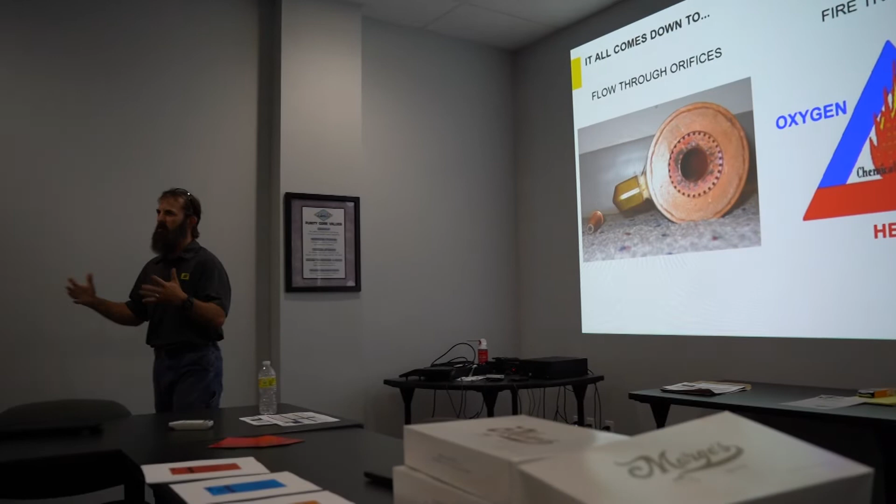What three things do we need to make a fire? If I remove any of those components, my fire goes out. Where this can get dangerous in the oxy-fuel world is our atmosphere is roughly 20% oxygen. I know it's not exact, but I like nice even round numbers, so I'll keep it simple. So things that will burn in our atmosphere, paper, cardboard, whatever it might be, in a pure oxygen environment are going to burn 5 times faster.

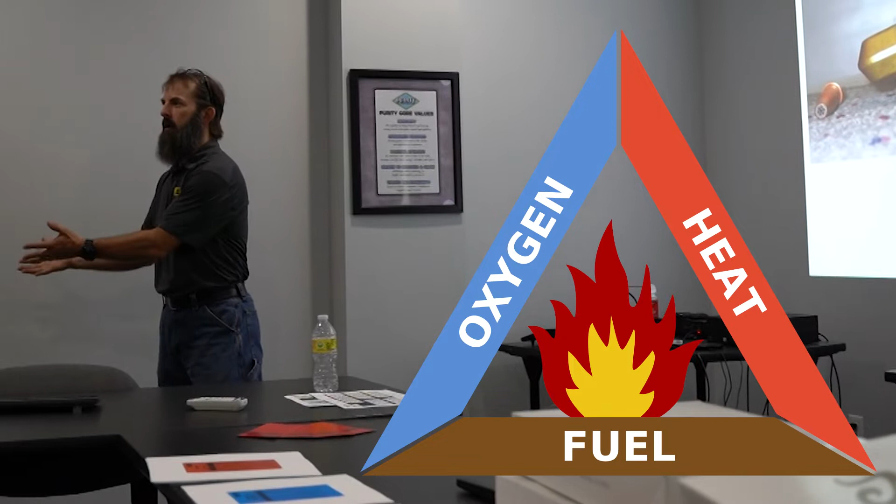Things that won't burn in our environment, brass, steel, wool, things like that. I can put flame to it, it'll get hot, it might deform, but it's not going to just burn unless I put it in a pure oxygen environment. And that's where bad things can happen in the shop, because now we get what we call a flashback, or we get a sustained backfire. Now the flame is burning inside, the torch starts burning, people panic, they run for the hills, I'm feeding straight oxygen to it, and now my hose, my torch, whatever it might be, becomes the fuel.

So one of the things you'll see that we do and what we recommend is always oxygen first, oxygen first, oxygen first. So when I do setup, when I do shutdown, I'm always going to oxygen first. We want to shut off that oxygen, take that out of the triangle, so now my brass component that's laying on the floor on fire will no longer burn.

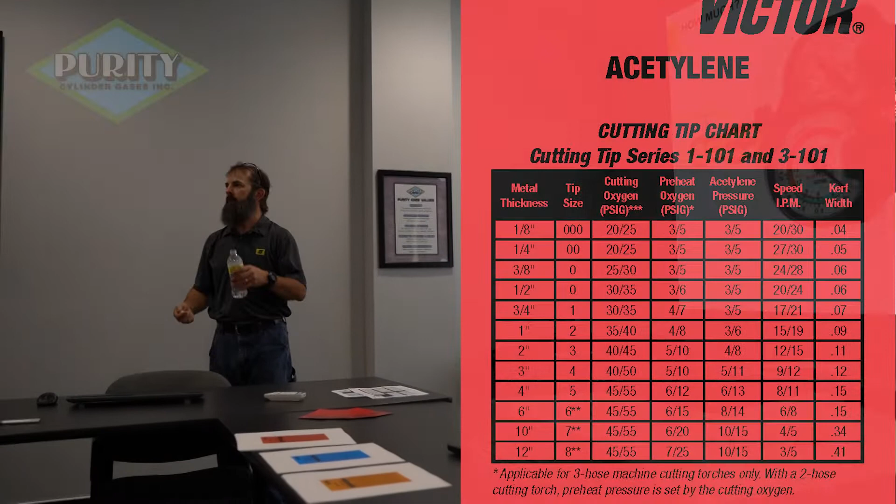All right, so when we start talking about regulators, we're going to hook up our regulator to our cylinder and we're going to set it to something. How do we know what to set it to? What size tip are you using? What fuel gas are you using? For how much pressure, we want to go to the tip chart so we know what we're using.

I think you guys are pretty familiar with how acetylene cylinders are made. It's the only pressurized gas cylinder that's not hollow, and there's acetone in the bottom. First bold statement: never exceed 1/7 the volume of an acetylene cylinder. All right, so what the heck does that mean? Every cylinder is going to have a volume. In this case, I get 46 cubic feet per hour. If I pull more than that out of my cylinder, I can start pulling acetone into the system.

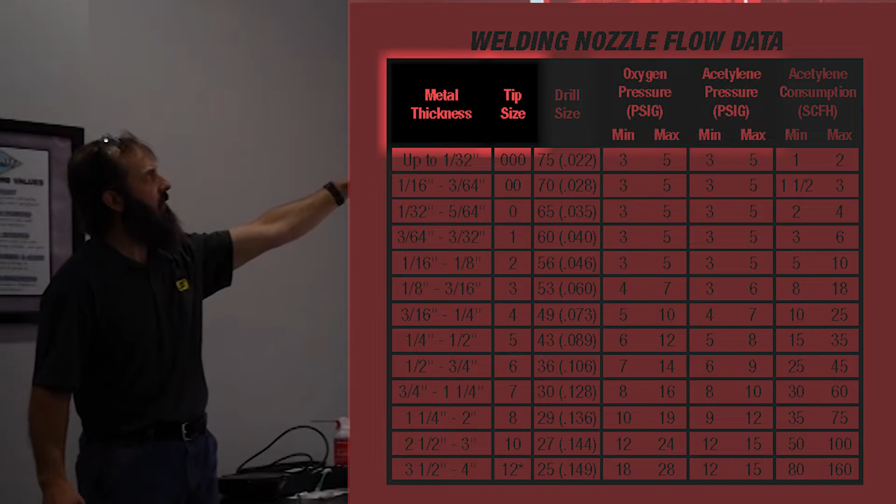Well, how do I know how much I'm going to pull out of it? On the left, up here, you'll see metal thickness, tip size. I've got some pressure settings. I've got acetylene consumption. That column never gets looked at. It's not as common in cutting tips, but in heating tips especially, this is where we can really get into a lot of issues. I want to know what my consumption is for whatever attachment I have on my handle.

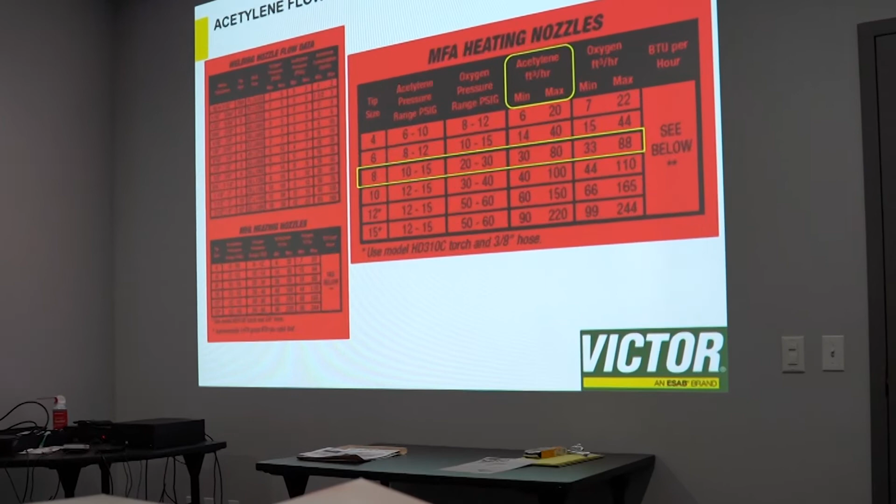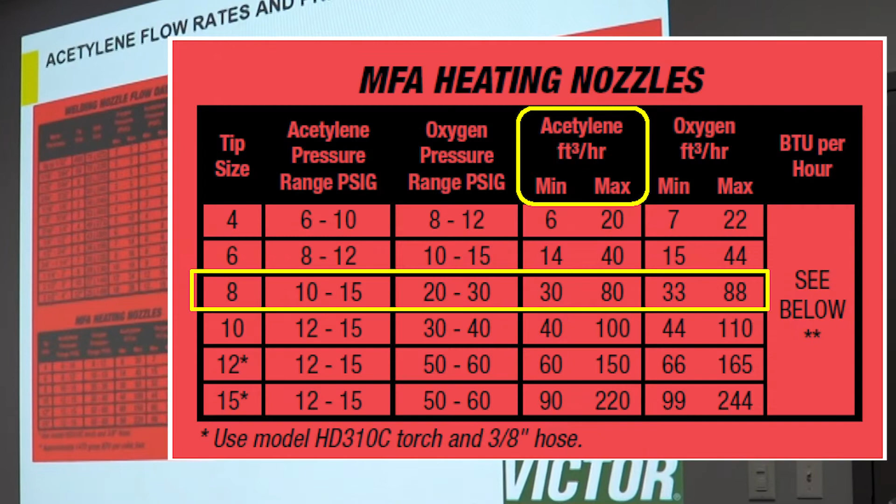Number 8, very common. You guys probably have it sitting on the shelf right now. If somebody comes in and says, I need a rosebud, yep, they're right over there. What size do you need? The biggest one you got. That's usually where it goes. All right? You're probably not thinking, man, I wonder if that guy's got the right size acetylene cylinder for that number 8 rosebud. He picks it off the counter, he brings it to you and says, here, I want to buy this. You say, thank you very much, I'll take your money. Here's your rosebud, sir. Have a good day. Thank you for choosing Purity, right? That's how it goes.

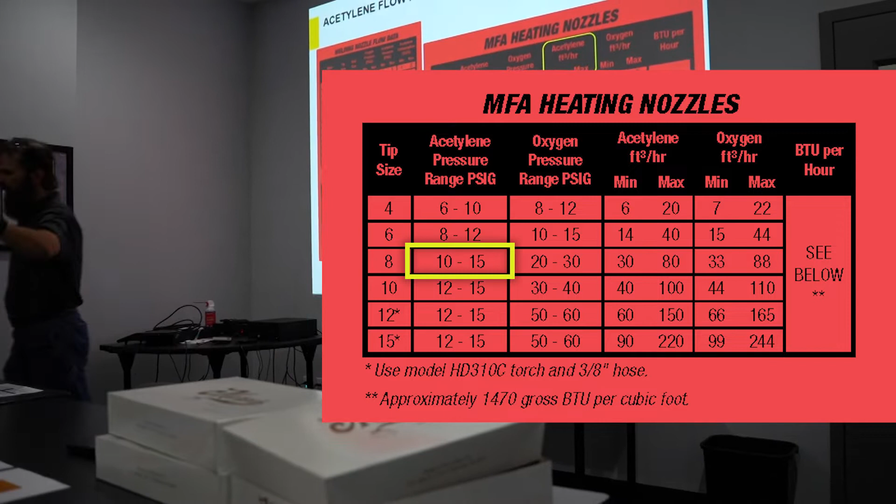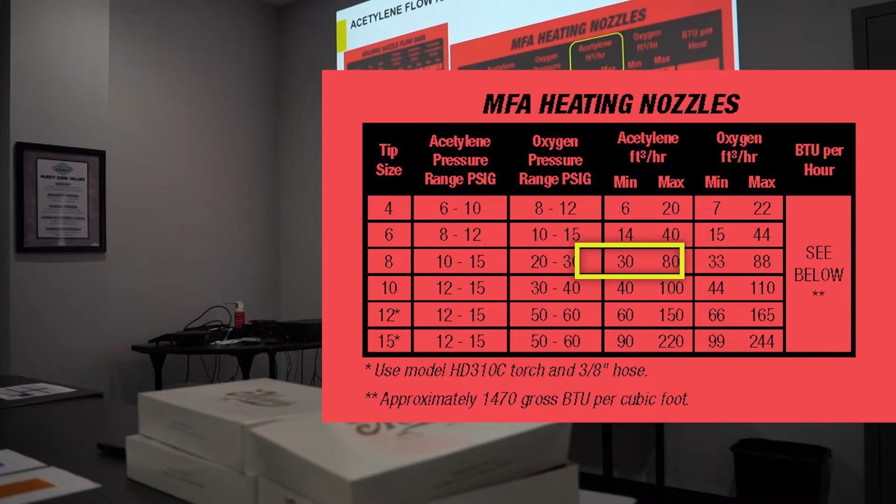I have a range of pressures that I can use. The other thing that we've always been taught is never use acetylene over 15 psi. But if I look at my consumption, I've got a big range from 30 to 80 in how much that rosebud needs to run properly.

So typically what happens is it'll run good for 5, 10, 15 minutes, and then all of a sudden it starts popping. And then it gets worse. It pops, pops, pops. And a lot of the more veteran people, I'll always use that term, they're like, oh, that's what rosebuds do. That's just what happens when you run a heating attachment. They get so hot it just pops.

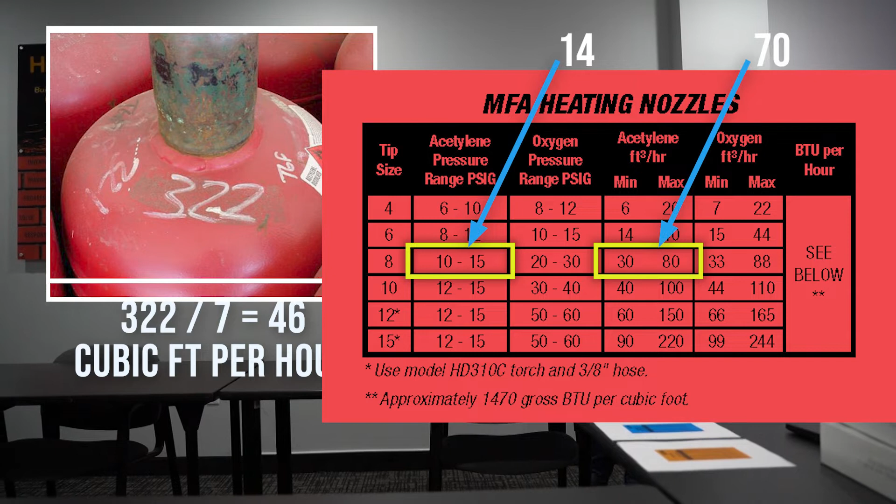Any Oxy-Fuel system, if it's set up properly, should not pop. It's going to happen. You might bump it, or you might have forgotten to make an adjustment or whatever. So it does happen occasionally, but it's not supposed to. I'm allowed 46. If I'm at 14, I'm probably around 70. So I would actually need 2 of those big 300 cubic feet cylinders to properly feed that rosebud.

And there's nothing I can do to change that. I can't just throttle back on the valves or anything like that. If I'm going to run it at a given pressure, I need a certain amount of volume. Yeah, so that's another way to reverse engineer this. If a guy comes up and says, okay, I want this really nice contender kit. Man, that thing's awesome and Purity's got a smoking deal on it. All right? It's got everything I need in it.

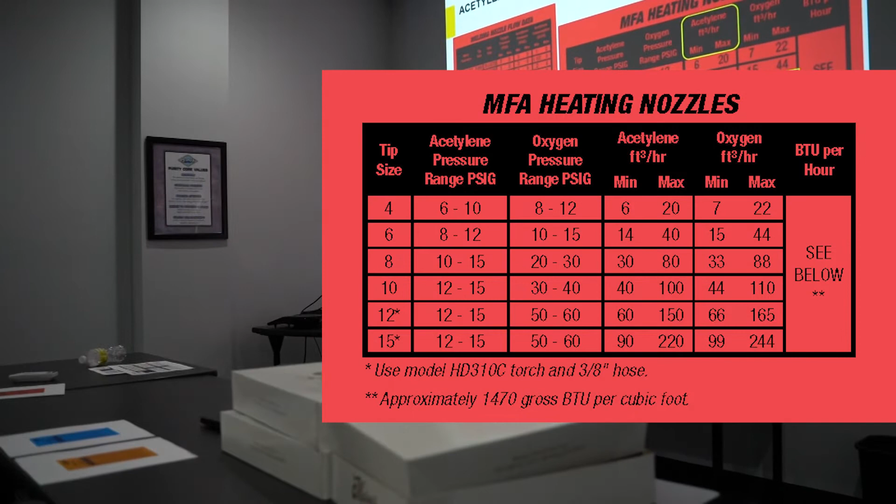Now they're going to come to you and go, what do I need? I need gas. I look at my attachment, number 8, the minimum, 30. Multiply that by 7, I need a cylinder that has at least 210 cubic feet in it to properly feed a number 8 rosebud. On the low side.

On the low side. My general approach is if you're going to be primarily cutting and occasionally heating, acetylene might be better. It's probably going to be a little bit faster on the cutting side. If they're mostly heating and they're just going to do some occasional cutting, go with propane or propylene. It's a lot safer. You don't have to worry about that 1/7 rule. I can put a massive rosebud on there and I don't have those safety concerns, right?

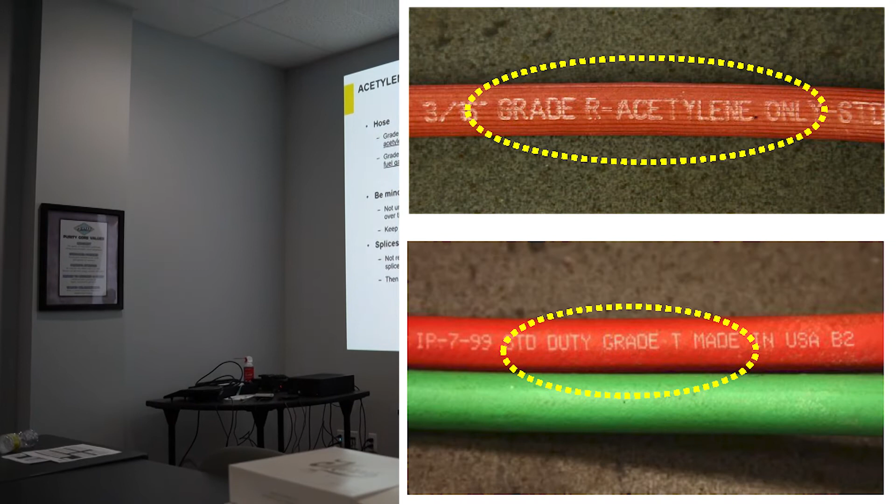The other thing real quick is there are 2 different types of hoses. All of our outfits come with T grade, so they're rated for all fuels. I don't know why they just don't get rid of R grade if T works for everything. You definitely don't want to use R grade with your alternate fuels, propane, propylene. I think it's propylene. If the system is left pressurized within like 45 minutes to an hour, it can actually start swelling the hose to the point where it can burst, and now you're filling your room with a fuel gas and plenty of oxygen in the air to make a boom.

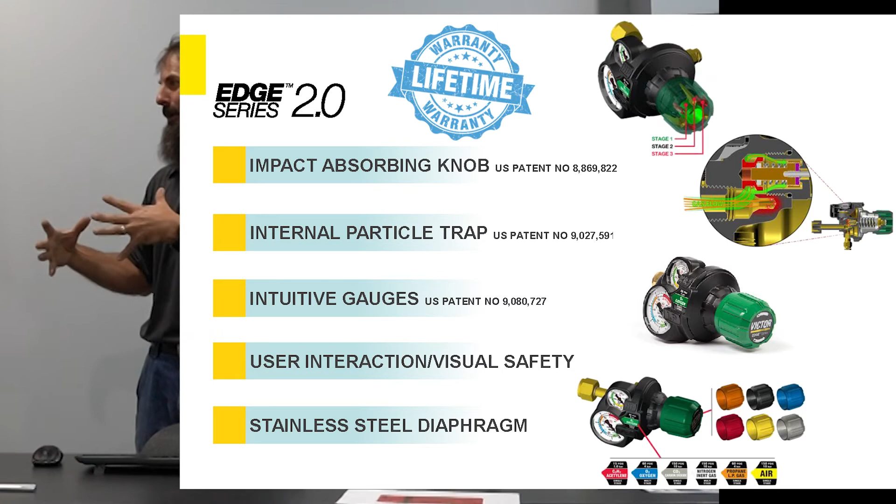The guy that started Victor lost an eye in an industrial accident. I think it was a regulator that blew up. And he's like, there's gotta be a safer way to do this. Just some of the safety features that we've built into the Edge. This is the safest regulator on the market. All the Victor stuff that is rated like light duty, medium duty, heavy duty, it's not a durability, it's kind of mismarketed. It's flow capacity.

So we released the Edge and then we improved it a little bit. So there was an Edge, and then the Edge 2.0 is just the next version of the Edge. But both, the medium and heavy duty, are both Edge 2.0. We changed the gauges. We made the delivery side bigger than the source side of the gauge because that's what people are more concerned about. The original Edge, they were both the same.

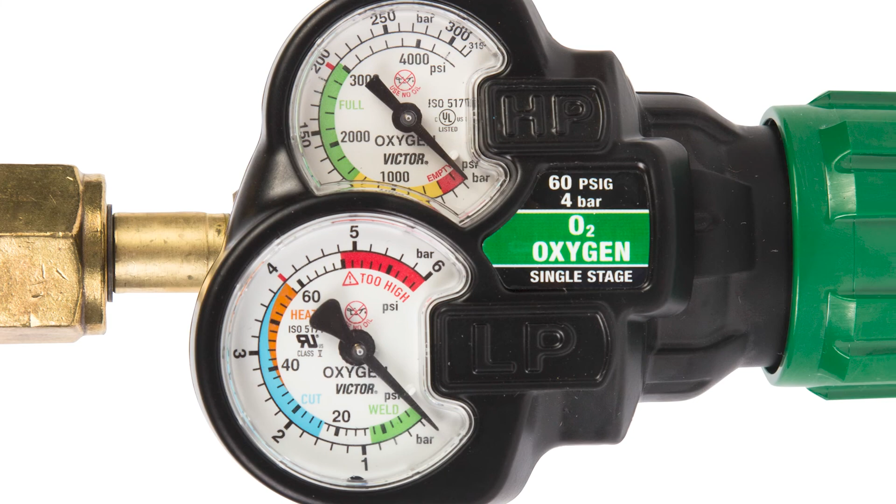We extended the stem a little bit to make it easier to get a wrench on it to tighten it. The first one was a little bit tighter. The safety features are the same, but we just made a few improvements. So we rounded everything off so there weren't sharp edges, just little stuff.